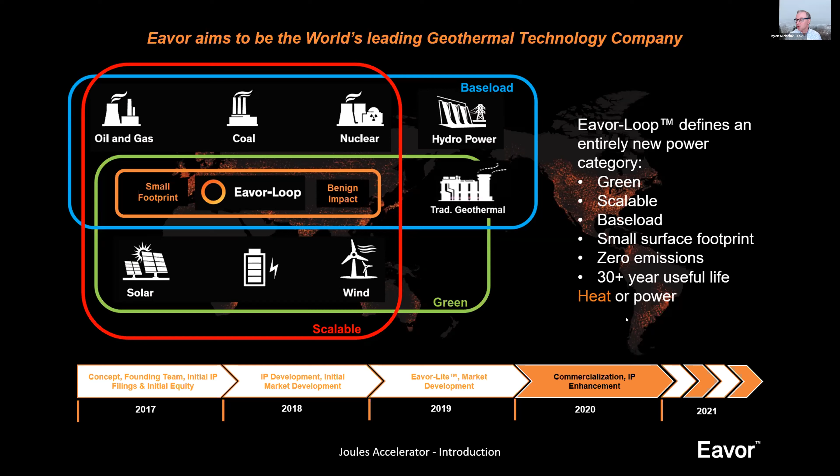As you can see, sort of our timeline here: we were founded in 2017. In 2018, we did a bunch of technology development. In 2019, we put that to work by doing a $10 million commercial pilot, or near commercial scale pilot. And now we are working on commercialization, so we're looking for customers for our technology to deploy it.

What is an Eavor-Loop? An Eavor-Loop consists—it looks like this outline on the slide, I'm hoping you're seeing my mouse move. What happens is we make a giant radiator in the earth, using traditional oil and gas drilling technologies, but those have advanced significantly in the past several years. This is a closed loop system, basically a closed pipe system. Cool fluid goes down cold, travels laterally, and during the residency time it has in the earth, it picks up heat. After it picks up that heat, it naturally flows to the surface where it can be extracted for things like industrial heat uses, district heating, or to create electricity using off-the-shelf heat-to-power technology.

That's not our technology, it's well-developed technology with multiple vendors. Then that fluid, once it's cooled again and the heat's been extracted, it comes down, goes back into the giant radiator, and comes back up to the surface where we extract the heat again. Elements of our technology include this multilateral rock pipe, which means that we do not have steel casing, and that greatly improves the capital efficiency of doing an Eavor-Loop.

Unlike wind and solar, an Eavor-Loop is dispatchable. That means we can produce the power or the heat when it is required by the customer. This slide shows a traditional baseload power being flat, which an Eavor-Loop can do. But it also shows solar, which is intermittent and is there during the day, and how the Eavor-Loop can be run to fill in the gap and create the load following profile that an energy grid needs to serve its customers. All kinds of profiles are available for this.

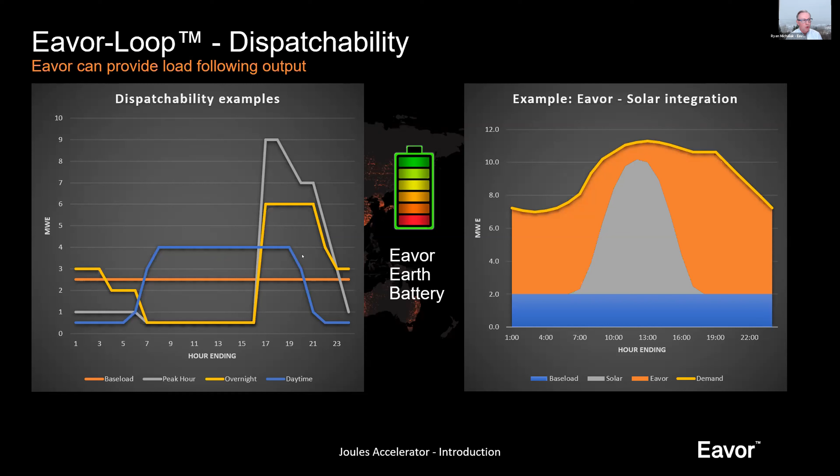Our solution is still pretty expensive, and we're economic in high tariff zones - Japan, Germany, places like that where they have high energy prices. We're working on a commercial project in Germany. As we progress with both repeatability and development of specialized drilling rigs and some technology that we're proving up this summer and testing, we'll be able to bring down the cost curve to ultimately become grid competitive within about 5 years.

So in summary, what we solve is we create this new energy category. We're very complementary with the other renewables. We can be co-located with wind and solar, so we can actually utilize the infrastructure that was built for the peak supply of wind and solar, but fill in the gaps with us.

I think we're particularly attractive on a resiliency front, in places where you need to have power and ensure that you have it - things like power for a nuclear shutdown. If you're shutting down a plant, Fukushima unfortunately didn't have that. Our infrastructure can be used for military use, it can be hardened and entirely done subsurface, and for places like data centers - we provide both industrial cooling as well as electricity.

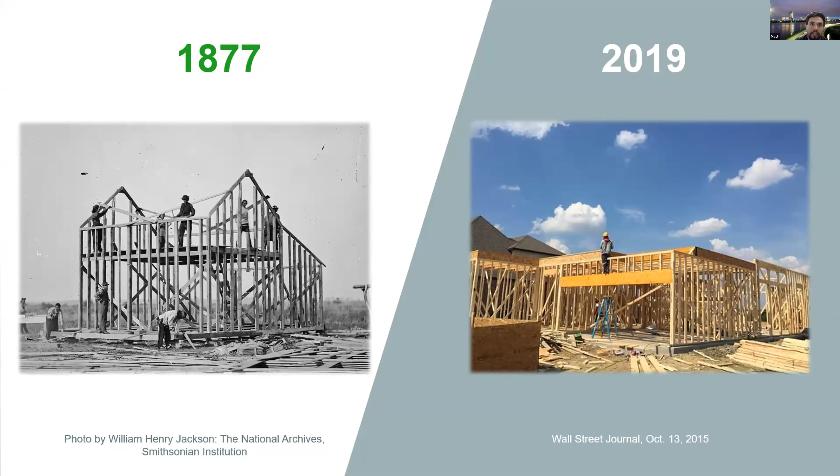I want to start by showing two pictures of residential construction. In 1877, we constructed wood frame houses with standard insulation. Fast forward 150 years, the methods and materials used have not changed. We still use energy intensive materials in a 21st century home, which leads to very high energy consumption. In 2018 alone, Americans spent over $372 billion to heat and cool their homes.

This number is real and is going to double in the next 30 years with the current technology we have. It's caught the attention of a number of states, which are now passing legislation that requires each and every home to become a net zero energy home.

A net zero energy home uses 80% less energy than a traditional home and produces the remainder using renewable sources. So how can we get this 80% energy reduction in the most cost-effective way? Well, it begins with a simple solution developed by EnKoat.

At EnKoat, we've re-engineered paint, plaster, and stucco to provide insulative properties. Our patent-pending coatings are incorporated with microsphere technology. Let me tell you how they work.

The insulative properties within the coatings become active once the outdoor temperature rises above 78 or drops below 72, thus giving rise to the term active insulation.

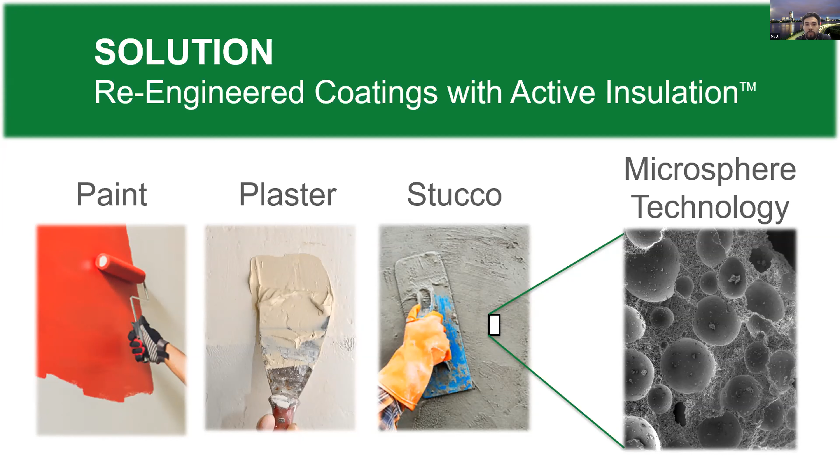Now, to better understand it, the dashed line in the figure represents the temperature that you set your thermostat to. When the temperature goes above 75, your air conditioner would turn on. When it goes below, your heater would turn on.

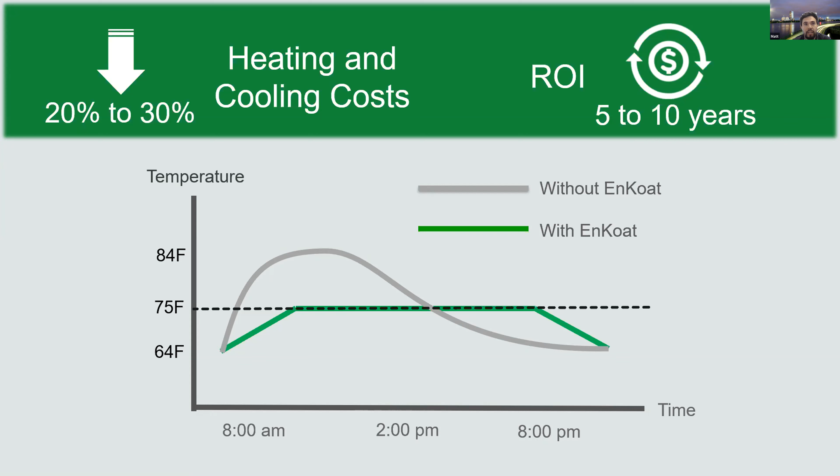Both scenarios lead to an increase in electricity consumption, but with EnKoat's coatings, the temperature would stay at a constant 75 degrees for most part of the day. This would lead directly to a 20 to 30% reduction in the heating and cooling costs.

Now, fiberglass insulation is what's typically found in homes. Through rigorous testing, we have found that a very thin layer of EnKoat plaster is equivalent to a very thick layer of fiberglass insulation. So the difference is our coatings don't just slow down heat the way fiberglass insulation does. They actually collect, store, and release that heat at a constant temperature to maintain the temperature inside a family's home.

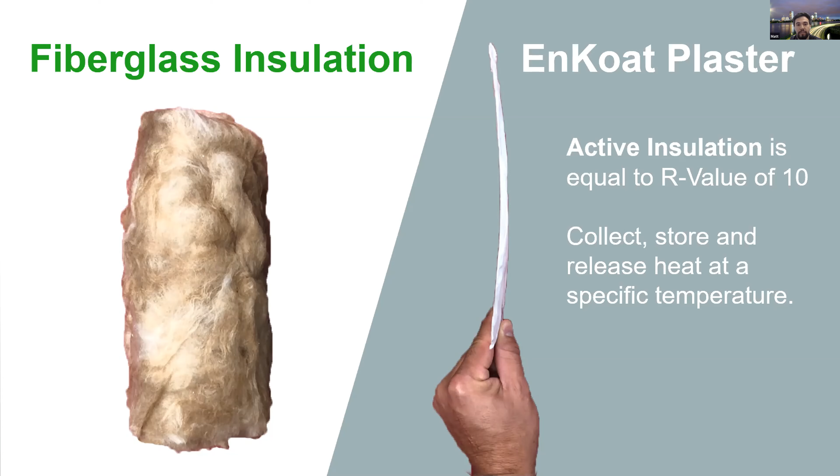Shane and I both have our PhDs in structures and materials engineering, and we've been working together developing innovative materials for the last 15 years. During this time, we both led multi-million-dollar projects from the fundamental research stage into fully deployable commercial products.

And we know that we can't do this on our own. So we've surrounded ourselves with experienced and trusted industry professionals who have delivered products and services to millions of homeowners. Our great group of advisors have helped us build relationships with industry professionals who could assist in commercializing our technology.

Over the last few months, we've connected with several stakeholders to discuss potential collaborations on upcoming projects. This isn't just an idea. We've been developing this technology for the last 5 years, and we've moved from lab scale testing to field scale testing on the walls and roof of an actual building. We're currently working directly with the National Renewable Energy Laboratory to validate our coatings' performance and energy savings.

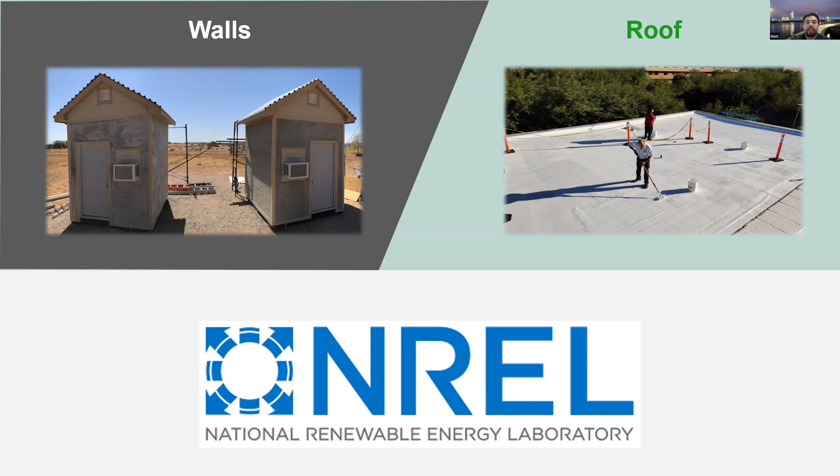Some of the challenges we're currently facing are finding the right partners to help us implement our technology and start gaining traction, and using these same partners to help us understand the current unit economics. Finally, implementing a pilot project at scale would show the proof of concept that would make our technology commercially viable.

Some of the opportunities we have are over $600,000 pending in SBIR grants that are going to help us with continued product development on our coatings and to develop new products to reach a larger target market. As we continue to file additional patents, we'll not only increase our IP portfolio, but we're building barriers around our technology.

And this year, we're focused on engaging with more stakeholders and getting a robust pilot started. This will set the foundation for accelerated growth over the next 3 years. And we're super excited to be a part of the Joules Accelerator, and we're definitely looking forward to working with the network there in North Carolina.

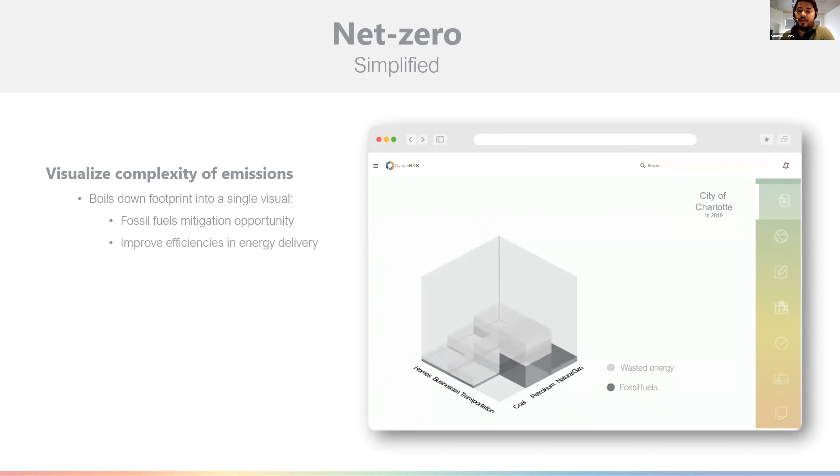So that was the start of Dynamhex. What we do is we visualize, as a first step, for each entity where their emissions are coming from. So what you're seeing here is all the emissions-laden fuels and energy used by a specific entity—it could be the city of Charlotte, the state of North Carolina, or a specific building. And we look at opportunities for energy efficiency, retrofits, retrocommissioning. We look at your ability to deploy more solar at the rooftop level or the utility side, basically anything that allows you to tangibly reduce your emissions at the asset level, rolled up to the entity level.

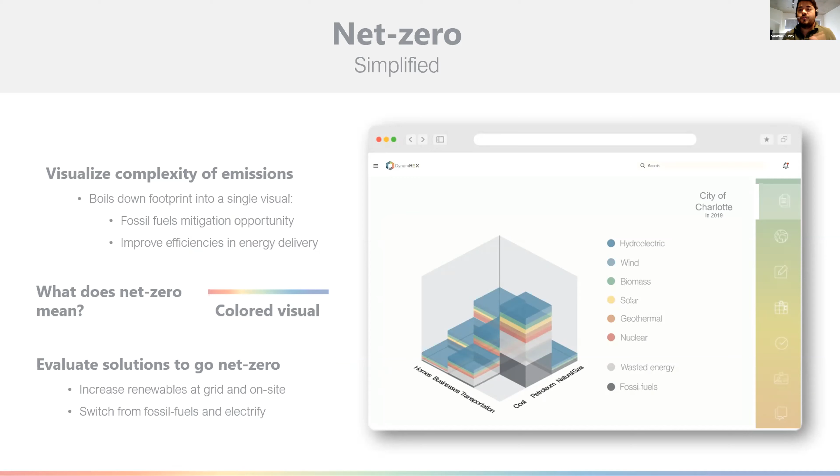So, kind of a visual, a picture says a thousand words kind of thing. Every entity, every company, every city can have a visual that shows where they are in terms of net zero and where they ought to be. That was our first step, visual analytics.

On top of that, what we've created is an ability for all these entities to internally decide which projects they should consider, both on the cost side and the impact side in terms of carbon abated—you could do it by methane, CO2, whichever emissions you'd want to reduce. And we've integrated more than 20 data sets so that we make the data crunching happen for you instead of you wrangling with 20 to 25 spreadsheets and other pieces of information. So you could tie it to the Paris targets, the Charlotte City Ordinance, the Raleigh Resolution. You could do it at the building level, or at the vehicle fleet level.

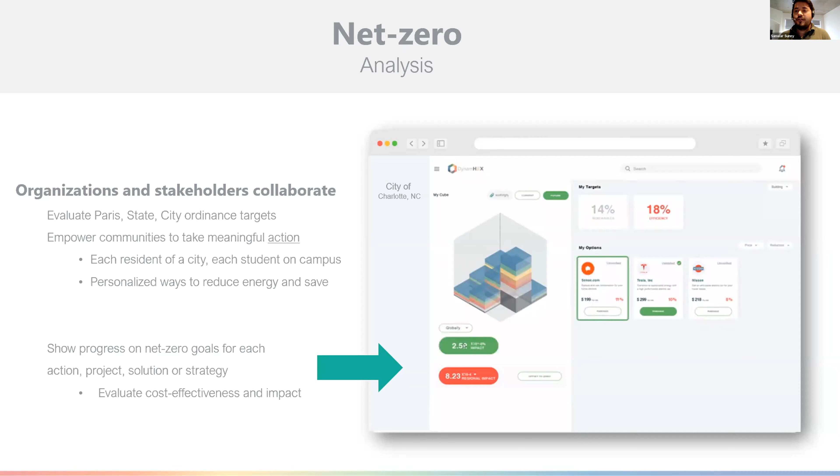Basically it gives you the whole clarity that you need to know where you are now, today, and where you want to be in the future in terms of your net zero plan, and the solutions and technologies that help you get there.

So you can imagine all of the startups you'll hear from today playing a pretty big role in this, because through their business models, technologies, and projects, folks like Duke Energy, cities, universities, and companies are going to be meeting their targets.

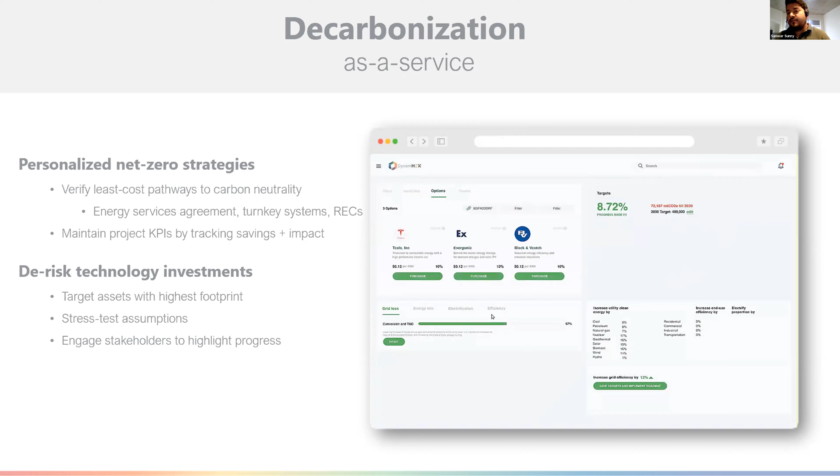And we show that for our partners. This is personalized completely for each organization, each industry, each sector, whether you have industrial facilities, commercial building space, or lease fleet vehicles, we personalize your net zero targets for you.

Instead of doing these spreadsheets of climate action disjointedly, we are integrating it into a North Carolina specific or city specific climate action plan where each project could be suggested, tracked, and integrated with incentives available at different levels, so that we're getting to net zero quicker and at significantly less upfront cost than it currently costs a lot of people who have the interest of going net zero but don't have the in-house capacity to figure all of these things out.

And that's our plan with the product. We've already sold to a bunch of cities in the Midwest, working with a few big utilities, and we would like to personalize this approach for the Joules network and for the North Carolina region.

So if you were going to do a pilot for Raleigh, how would you go about it? What would it cost and what would the time be?

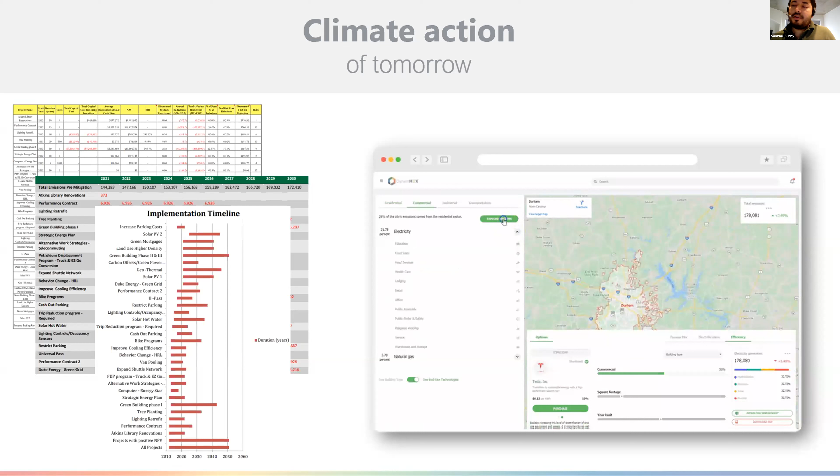And we use that at the granular level to populate and aggregate at the city level. Thank you, Sonny, very much. Appreciate your presentation. Look forward to your success.

So here at Flux Hybrids, we are offering aftermarket conversion kits that can convert almost any vehicle on the road today into a clean and efficient vehicle. You can go to the next slide, Cody.

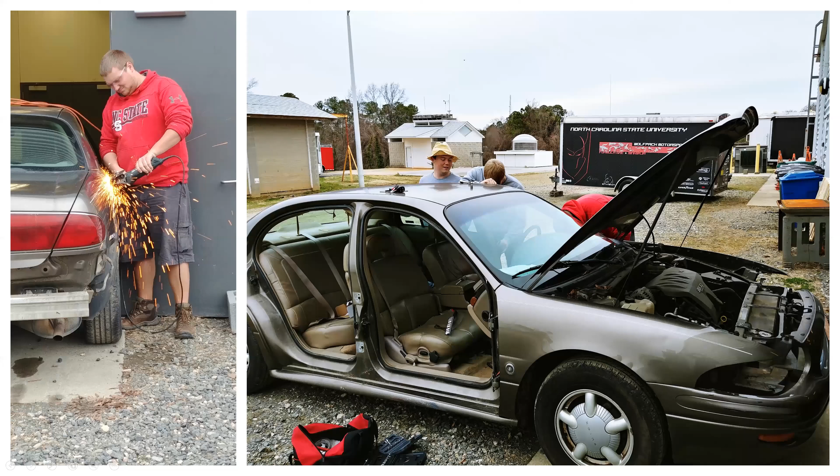And so, then Cody will go on and talk about where we're at with our kit and kind of what we've done with it. Thanks, August. So even before we graduated, we were putting our grit, grind, and hustle to work, developing something that will give all vehicles a second chance at sustainability. Here you can see we had attained shop space to put in our test mule, but it didn't really fit, so we had to make it fit.

Throughout the whole R&D process, which we're still involved in, we've relied on our experience in design and leadership gained through the NCSU Baja, Formula, and Solar Car teams, as well as the vast experience of our advisors: PhD engineers, startup founders, and local business leaders galore. All of that has culminated in a kit composed of an electric motor, batteries, and a custom control system that can add usable torque, increase fuel efficiency, and reduce emissions, all while taking away nothing from the vehicle. With average driving, it'll pay itself off in 5 years of just gas savings, and that's not even counting the engine and brake maintenance savings. And with all that, it'll reduce tailpipe emissions up to 59%.

It's a no-brainer. Because of that, we're in the middle of a pilot program with NC State where we're testing a converted Ford Ranger that's going to be used in their facilities fleet.

We're grateful to be part of Joules, and over the next 60 days, we want to try and kick our learning curve to the curb on scaling up by finding mentorship for things like cost-effective manufacturing and supply chain, and getting reliable logistics so we can get our parts to our customers.

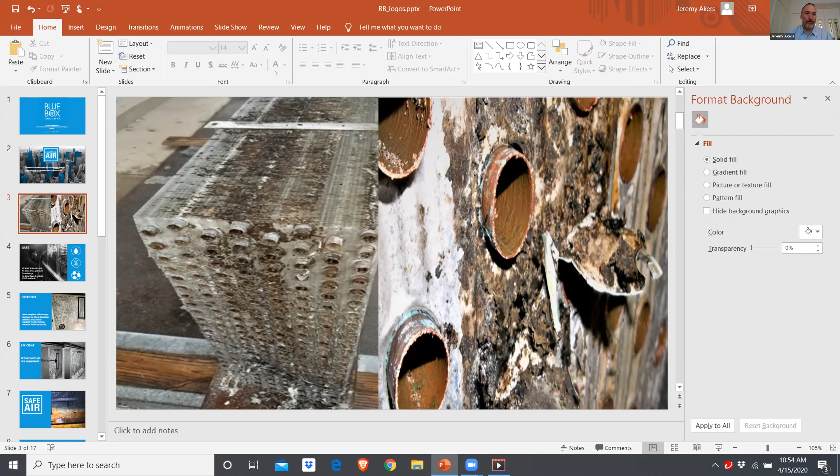Okay, thanks everybody. Yes, as Bob said, my name is Jeremy Akers. I am the Director of Business Development for Blue Box Air. Actually, first I want to say thank you to Bob and Ryan for pulling me into this, and obviously a thank you to EY and Microsoft and all of the partners. Beyond that, I'm humbled to be part of this group with Joules and every other company that's presented so far, because we are a decidedly low-tech innovation, and listening to everybody else, it's a little intimidating.

But I'll run through what we do, because we impact an area in the built environment that really hasn't been innovated in a very long time. So just to set the stage for you guys, in every building it used to be that about 50% of the energy was used by the HVAC system, and 50% would go to lighting. With everybody implementing LED lighting, you now have about 75% of the built environment energy use coming from HVAC, to condition the air that we're all used to in the built environment.

The problem is that inside these systems, the way they work, air flows through coils, and as the air flows through those coils, that's what conditions it and makes it hot or cold. Except the coils are dense, they're deep, they're easily fouled, and they get filled up with dirt and grime, and in a lot of cases they get filled up with bacteria, biofilm, and viruses.

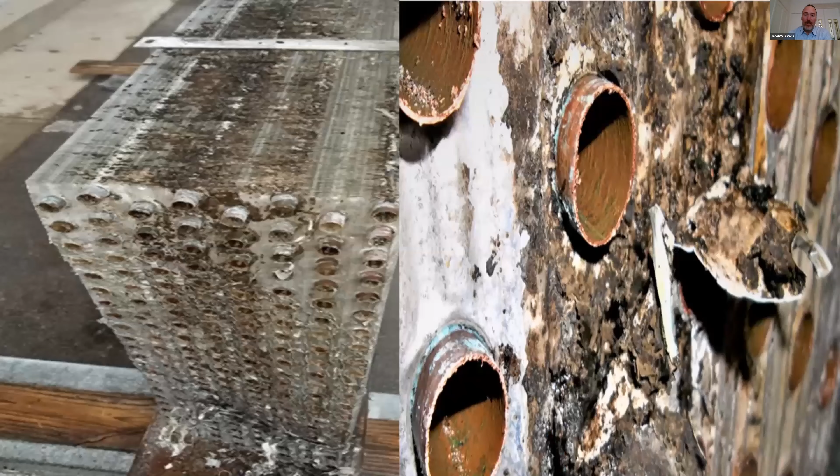But basically, we looked at this, and Blue Box is a whole new model for dealing with that area. Just to set the stage for you, this is a cross section of a coil, so you can see what I would be looking at here. On the big picture on the left, air would flow through this from either the left or right.

But what you see in the middle is a lot of dirt and grime, and that is from when somebody pressure washes a system or uses steam cleaning, they're pushing that dirt and grime and bacteria biofilm into the center of the equipment. What happens is as it gets clogged up, everybody is used to the fact that after a certain period of time, this equipment has to be replaced. And while it's clogged up, the motor pulling the air through and pushing it into the building has to work harder to move the required volume of air. You can clean it, it looks nice on the outside, but it still gets plugged up in the middle, and it causes the entire system to run inefficient and very unhealthily.

So what does Blue Box do? We've developed equipment and a system, and this is actually one of our very first pictures. This is our CEO here, treating one of our very first projects, I believe with the MGM Hotels and Resorts. We're fortunate to be a nationwide service capability, and we do work with some high-profile clients already, but this is our CEO on one of the first projects.

What he's doing is injecting a pH-neutral bioenzyme that we've developed for this process. The application process is low pressure, which means that in comparison to pressure washing and the like, this is actually not going to damage the metal or the fins. There's no hazardous chemicals in our process. Very important, because with no odor, it means we perform this work when the equipment is on. There's no downtime, no shutdown for this equipment, and we're able to come in on a Monday morning and do this.

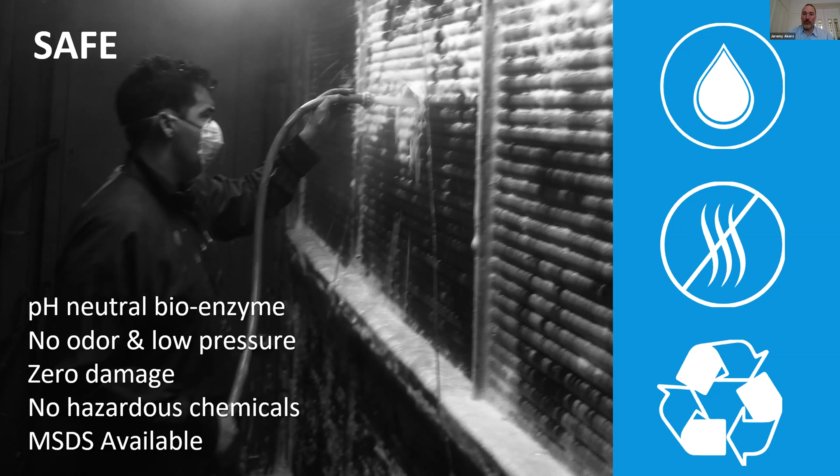What you're seeing here is the backside of the coil. This is effective because if we're injecting our enzymes in one area of the coil, they travel through, they push out the dirt and grime, and they're safe for down drain disposal.

Part of our method is that our technicians apply the enzymes in a very thick foam phase and look for blockage areas. In this highlight, you can see a circle and a rectangle on the side, but these are areas where there's a blockage inside of the system. We're able to punch through those blockage areas and basically restore the airflow, bringing efficiency back to the equipment.

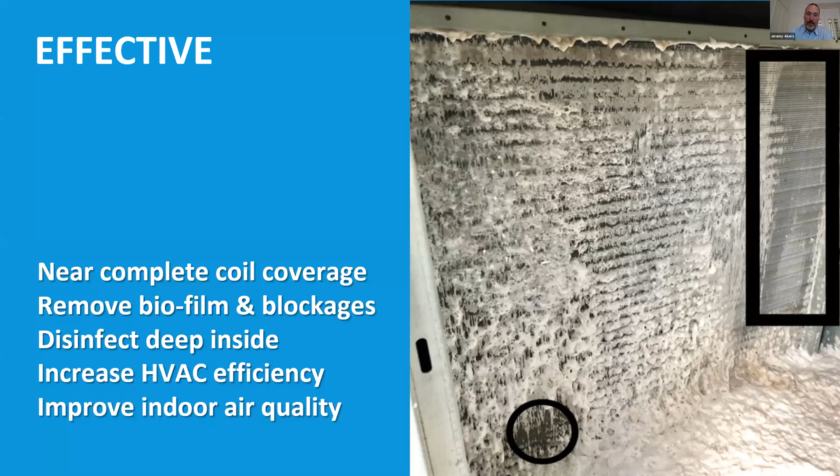Here's another image of it just to show what this looks like. But basically, as you're going, we map out the coils, we can see where the airflow is restricted, and we use various techniques with the enzymes to punch through and basically eat up any of the bacteria and biofilm that's inside of these systems.

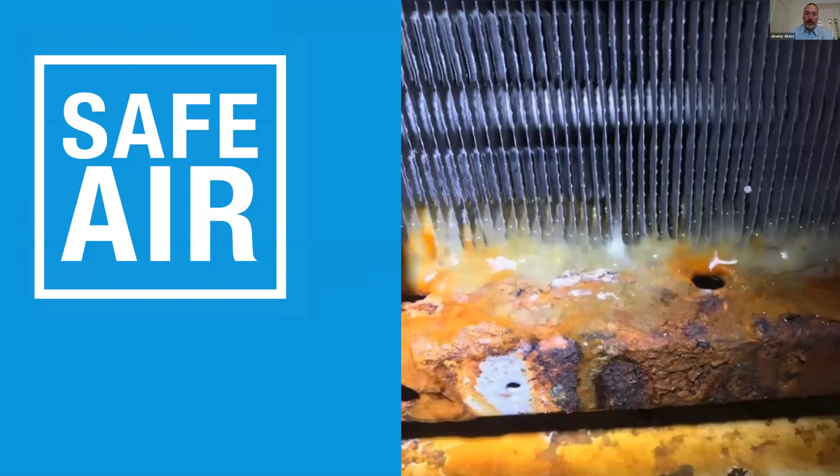Another one right here, this is biofilm. It's basically organic material that can jump into the coils, and in this environment, it'll propagate and grow. Our method is able to eat up the biofilm, push it out, and it's then safe for down drain disposal. We do a lot of work with hospitals where our enzymes encapsulate this bacteria and biofilm and take it down the drain, so it's not released into the airstream. We have tests with our hospital partners to show that.

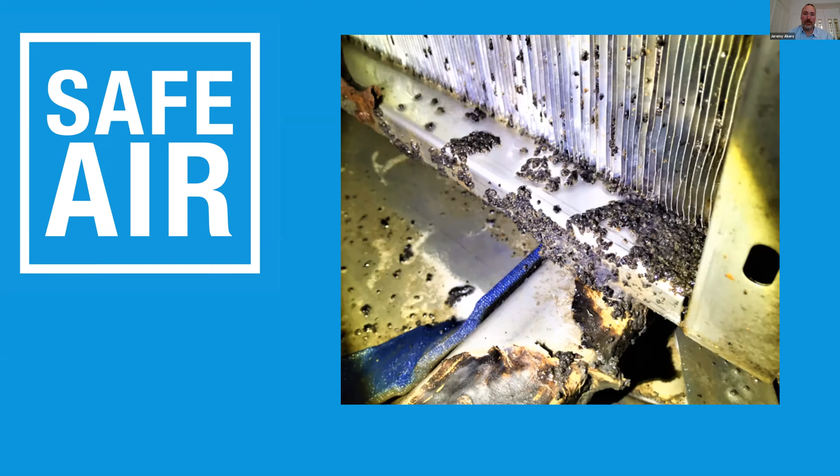Again, this is showing what this looks like oozing out of an air system. It's not something everybody wants to think about because it's the air we breathe and it's what's out there, but this is what we're here to solve.

Our service, because we get complete coil coverage, has adapted recently. With our enzymes, we now have a secondary process where we're adding in a chlorine dioxide with our enzymes and applying that after we do the deep clean. That chlorine dioxide is a disinfectant, it's known, it's on the EPA approved website. When we apply that through the coils, we get complete coverage and complete disinfection. It's really one of the areas in a building that no other method is going to be able to disinfect.

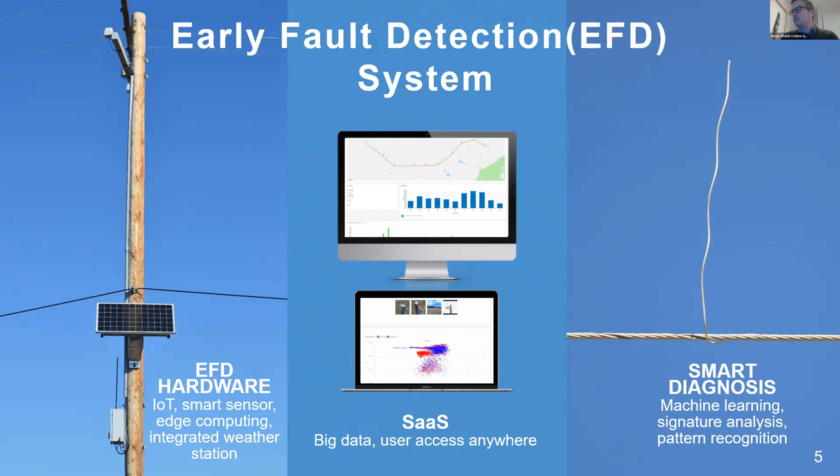Just a little bit about our background, probably a few categories here. Innovation's been recognised in a few fields, energy and defence. We've done our homework and all of our learning really at home in Australia. We entered the US market in July 2019, and we've had some success and been referred through to other customers off the back of that. So we're still a young company, but we now have 2,200 miles of network coverage in the pipe, in the bag, basically, as we speak.

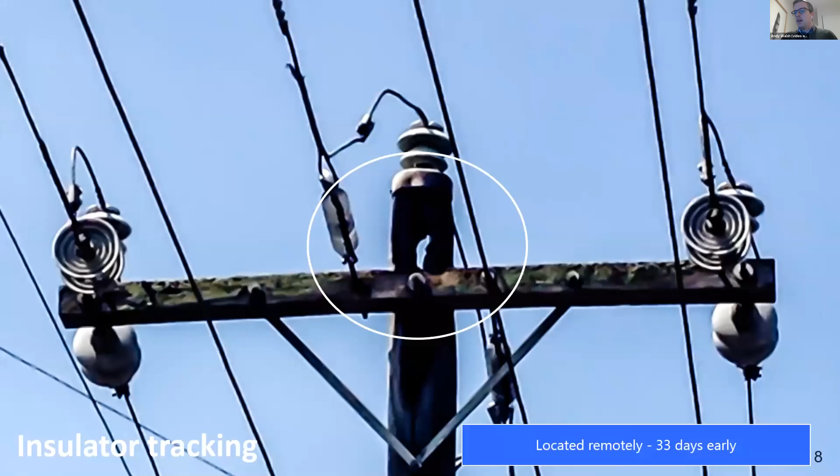So examples of what our partners are finding. What does an early fault look like? This was actually the first fault that Alan detected with the equipment, which he invented. This is an insulator that's had tracking across the insulators, and you can see in the middle of the pole there, the pole has been burnt out. That was detected 33 days in advance. The utility let the system run to see if our system was producing false positives, and a primary outage occurred at that location.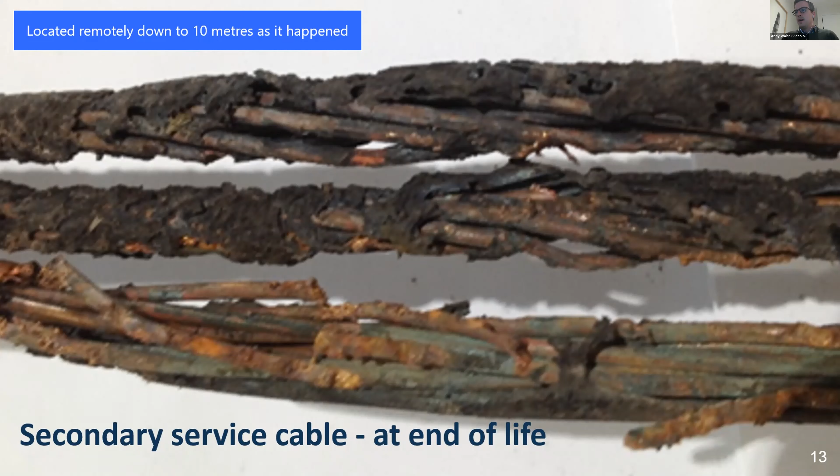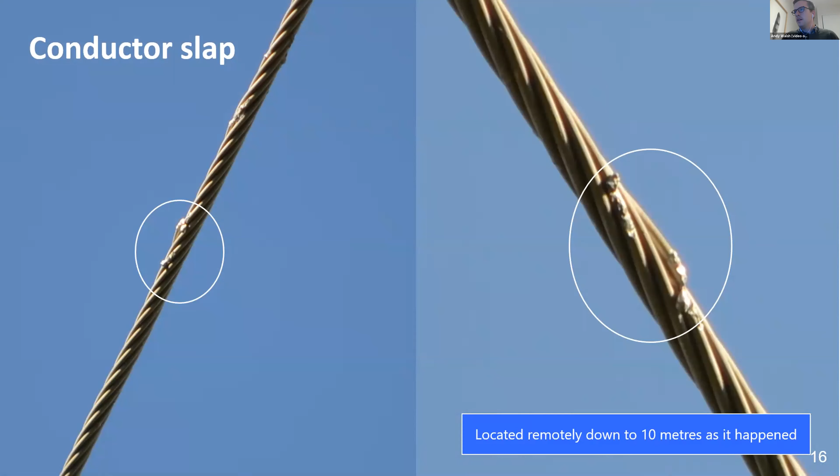Conductor slap, another issue, involves 2 of the primary conductors hitting, and you can see the issue that's detected there. Another one, crossarm at end of life, just conscious of time - you can see the insulators drop down on the crossarm there, and we've been able to detect and locate that before adverse outcomes.

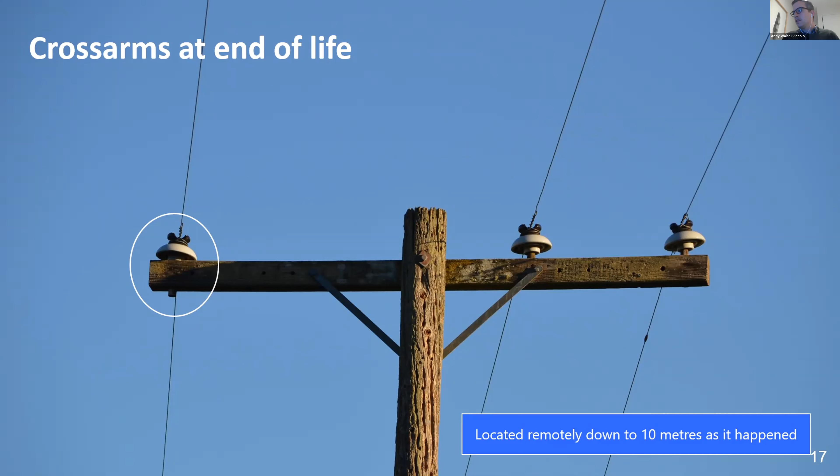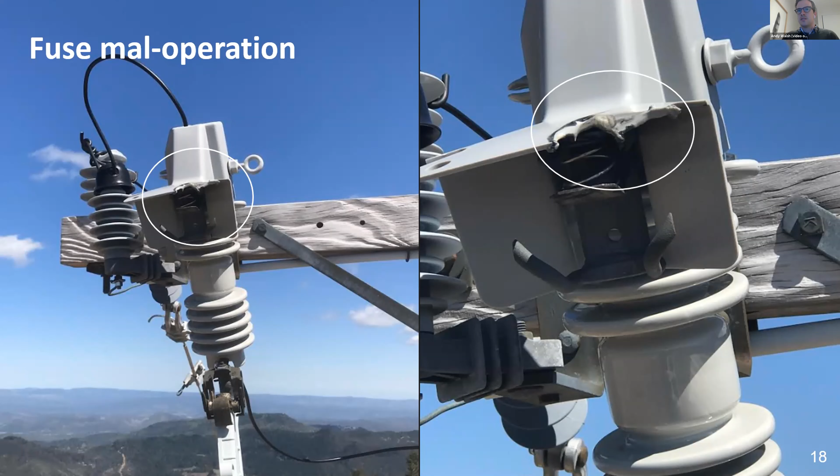And finally, just the fuse maloperation. Similar to what's in your house, these are designed to sectionalize lines. Sometimes things go wrong.

So what are our partners finding? Well, they're finding common threats that pose public safety and reliability risks. They're detected and diagnosed remotely. We're able to locate accurately down to 30 feet. In all cases, we're able to find issues before the risk was realized, and timely discovery is a relief to the network owner.

Finally, what would a rapid pilot or a 60-day trial look like? What can we do in North Carolina, and what we're excited about doing? We have 15 units here on a pallet. We'd love to send them over to North Carolina, and customers that get the best results pick troublesome parts of the network to test our system on and get the maximum learnings.

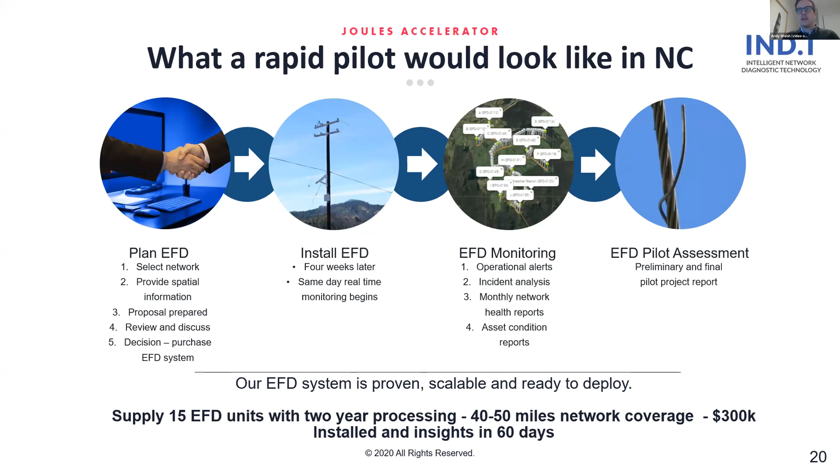And importantly, every customer that we've tried with, we've gone on and secured recurring business.

Sorry, Bob, a lot to take in, but I don't know if I've run over time. So thanks for your time, everybody. Yeah, thank you, Andy. Lots of questions coming in, pretty technical in some cases.

Can the technology detect electrical distribution issues within a building? Yes. Would you like to elaborate on that? Well, in terms of some of our incidents we've found, they haven't actually been on the networks, they've been in the customer's premises. So we're able to determine which side of the transformer it's coming through, and in some cases, it's in the customer's residence.

Are there examples of leveraging drone photography along with your predictive analytics? I think that's the future for the business, Bob. It will be alerts that come through on the system. We triage those off our system, but then basically deploy a drone to fly above the power line and do a first pass check before deploying the crews with the right tools to fix the problem.